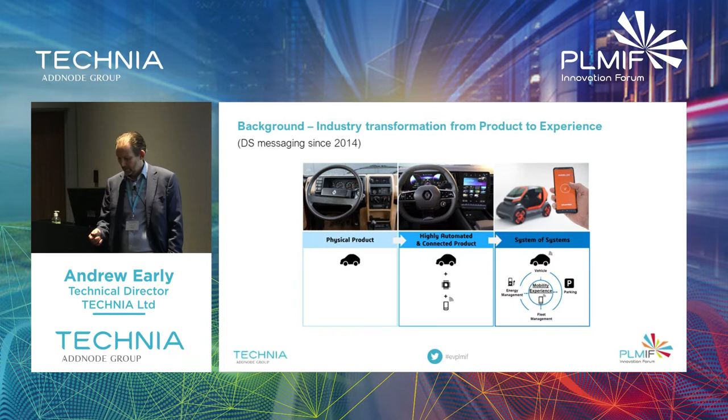So I've cheated a bit, and this should work. I made this little thing. This goes straight to the Dassault definition of what a virtual twin is as far as Dassault is concerned. So in short, there's the term digital twin, and then Dassault coined the term virtual twin. They also use the term virtual twin experiences. Personally, I think that's the most useful term.

In simple terms, Dassault's position is that a digital twin could just be effectively a dumb model of a physical object. I know in the US, they've effectively reverse engineered the B-52 bomber, which was designed on paper, but they've now made a 3D model of it. You could argue that's a sort of relatively dumb digital twin, not without utility, but Dassault's point of view is coming at the other end.

If you're engineering a product from the beginning, you want to have this environment where you're engineering, designing, specifying your products in a space that allows you to play through its in-use experience from the user's point of view, from the product's point of view as well, from its service life. So inevitably, that means simulation is actually right at the core of the virtual twin.

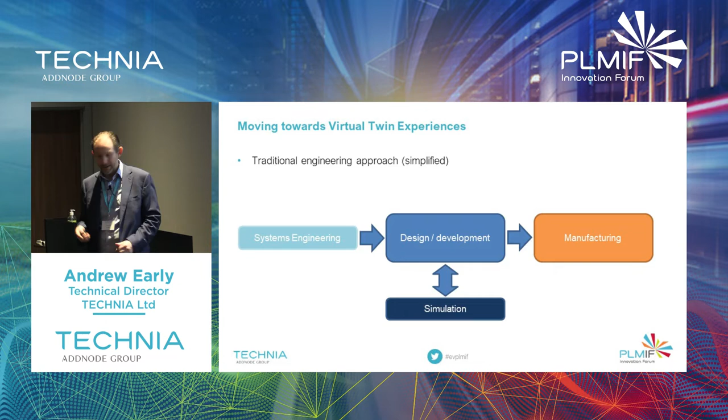If you think about it from a point of view of a more traditional look, and this is massively simplified, but just to give an idea, we had an environment where you had design and development with simulation feeding in, but you had systems engineers, often paper-based or even document-based, passing in information. These arrows represent essentially barriers, and I guess this represents to a certain extent silos, really. Then manufacturing follows design and development. It always would overlap in reality, but in simplistic terms, that's where we're sort of coming from. But that's left us in this world.

So this was last week, I was at a Dassault event, model-based systems engineering in Gothenburg. There was a very nice gentleman from Kongsberg Aerospace and Defence, and they're a long way down this road of basically digital processes for the systems engineering side of things, model-based systems engineering.

One of the problems they're trying to solve is exactly this. You've got so much information on these complex systems. The more complex we're getting with things, you've got requirements, you've got models for systems models, you've got dynamic models, you've got stress models, you've got CAD models, documents coming out of your ears, and you end up to the point you've got to have this new role, which is effectively a system archaeologist, which is not going to be any fun for anyone.

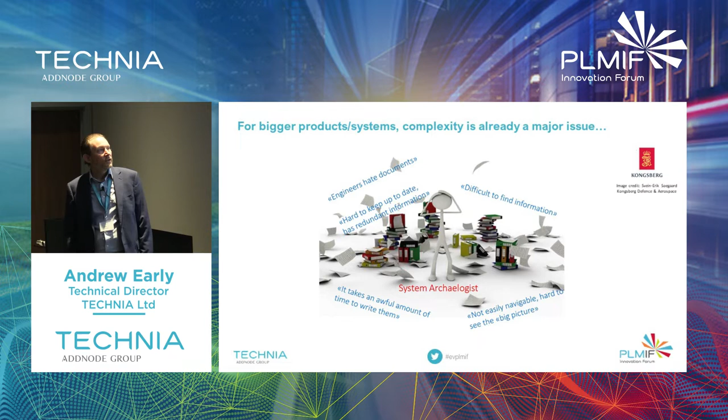One of the roles Dassault is trying to do with this virtual twin thing is the 3D Experience, which is effectively your digital repository of data and associated products. If you've got requirements, logical architecture, physical architecture and products designed in this environment, with people from different disciplines having access to what they need, things move faster and people make better decisions because all the information is available. That's why Dassault has invested so much in simulation, because it underpins everything going forward.

It's also a bit like Dassault acting as a parent, guiding us as a community towards doing the right thing. By getting our data into a system, in this case the 3D Experience platform, even though we might not be doing model-based systems engineering yet, or digital manufacturing, they're saying they'll curate and structure our data so that when we do start doing this, and customers and suppliers get us to work with them in this way, the system will support it. That's what I'd like to think anyway.

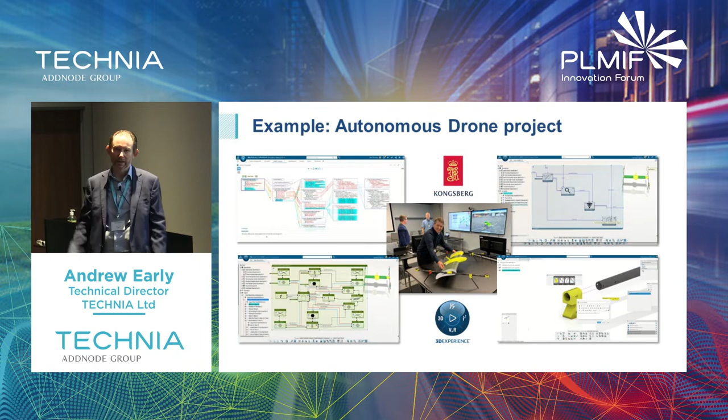Essentially, this is Kongsberg, the same company this gentleman was from, Aerospace and Defence. They've done quite a lot of this. Our colleagues in Sweden did an end-to-end expose to the senior management using a real product. So this is just a quick... does the video play by itself?

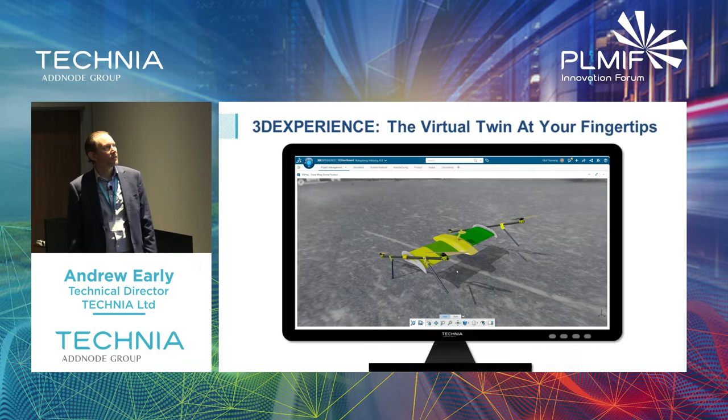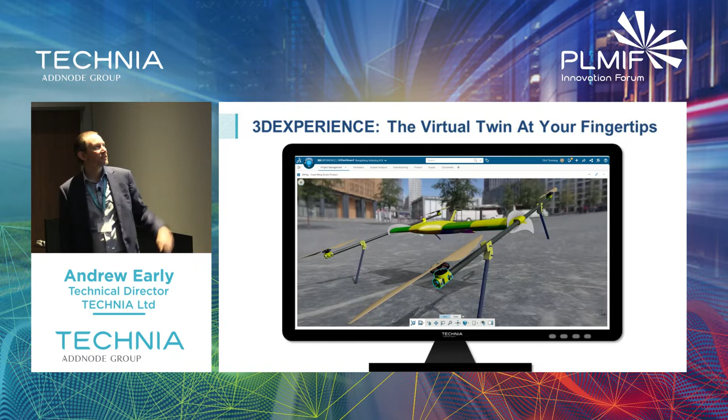Yes, so that's 3D Experience. This is a CAD model, from a student project, but the data is less important than the story it's telling. The nice thing about this is it's an autonomous drone, completely harmless - sorry, I had to put a bit of context there.

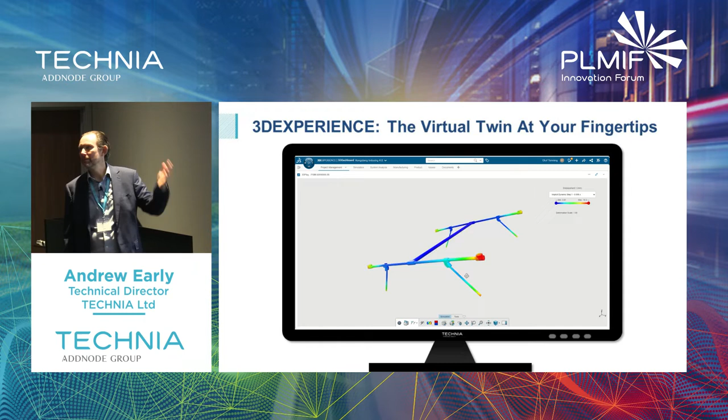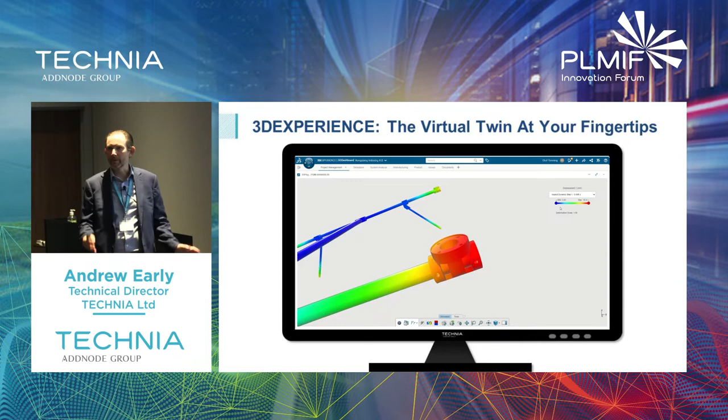You can see you've got the model for general information review, a simulation model of the same thing, and then a manufacturing work instruction model. The average person in 3D Experience can get hold of this data, view it and interrogate it, without going to the analyst, the manufacturing engineer, or the CAD engineer.

I'm going to skip a little on that since there's more later. So you start at requirements. On the platform, requirements are stored as database objects rather than documents, even though we've got a friendly view that looks like a document. That's good, because if requirements are stored as database objects, they can be shared between different people or stakeholders, be in different lifecycle states, be revisioned, and you can configure requirements.

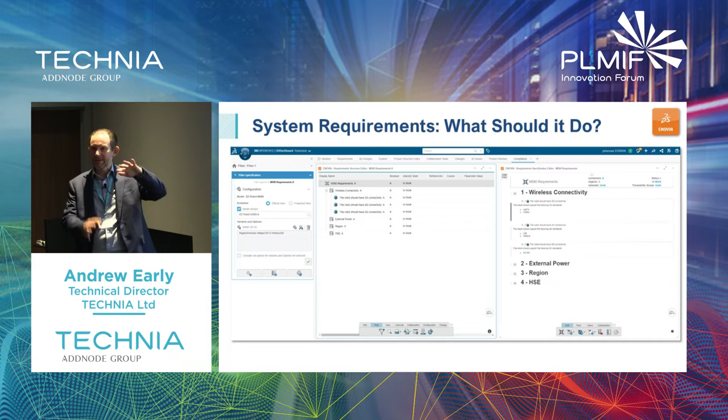If you have a product - a superset of requirements - that comes in three variants, you can filter those requirements down depending on which product it is. Collaboration at this level, until last week I was thinking, why do you need to do that? Then you speak to Airbus and BAE Systems, who are doing another type of autonomous drone that talks to flying radars and all manner of things, and you see that systems get very complicated, which brings us to functional models.

This is inside CATIA, but there are other tools that can be used to do this and then integrated with the platform. So what does it need to do? How should it work?

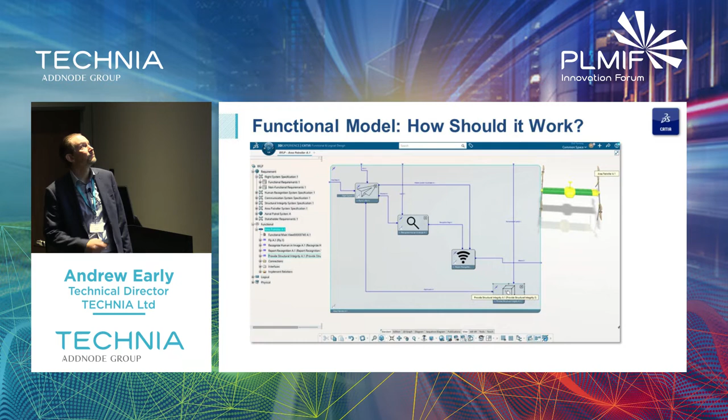Logical. How do you actually separate the product into modules that do certain things? So on the left, we've got the RFLP tree, which has been in native 3D Experience since it was there when I looked at it in 2009. So requirements, functional, logical, physical, which you'll see in a second. Behind these could be mathematical models that simulate the performance of that particular module, whatever it might be.

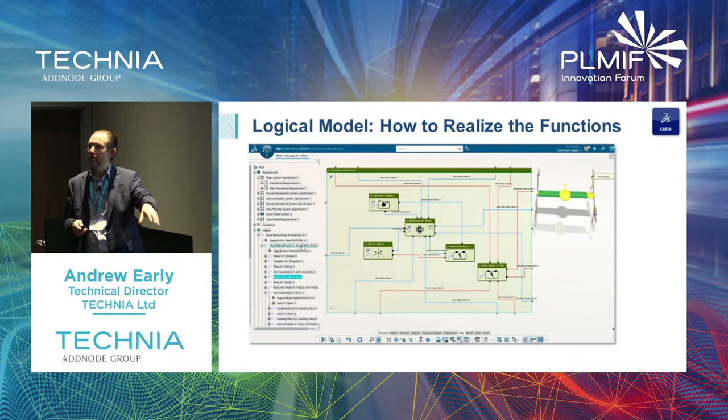The spoiler alert is that this can all be played in the platform using those mathematical models. You can have the CAD models moving around doing whatever it is you need to do. You can even have physical bits of hardware plugged into the platform, and instead of driving the model, you can actually drive the hardware with the software integrated into it. This is all absolutely present, and we saw all of this last week working, which I'll show a bit more.

And there's the CAD model. The nice thing now is that each object of the CAD model is linked back to the objects you've previously defined. So what requirements are they satisfying? What logical objects do they represent? Or functional objects do they represent?

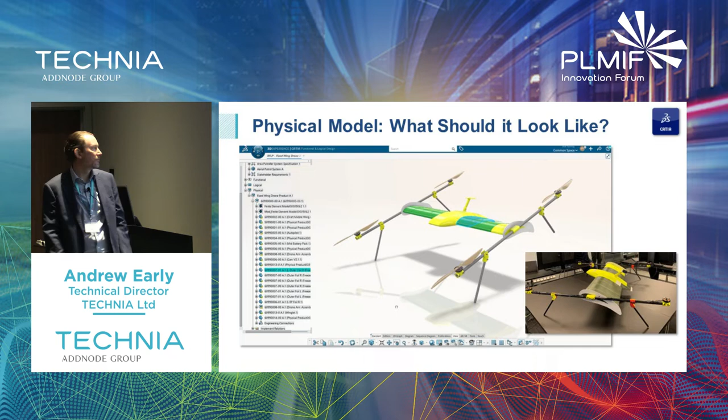Simulation model. Will it break? Red is bad, I'm told. And then you've got your manufacturing model, your work instructions.

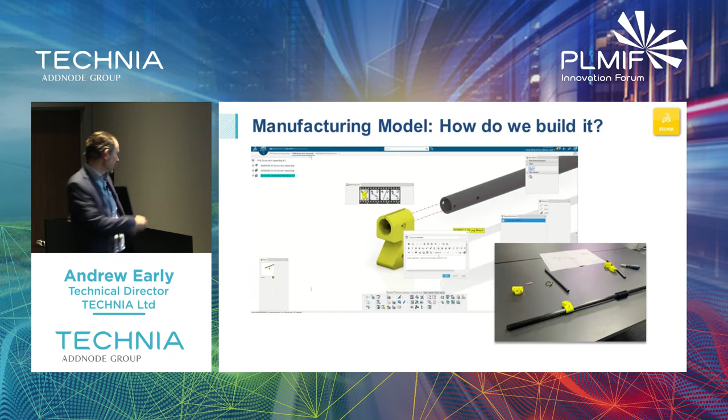So in the full version of this, we actually go through a process of saying, okay, design change comes in. So I'm just going to trail that a little bit. So here we've got requirements. This is a CATIA screen showing this whole MBSE style traceable tree, effectively.

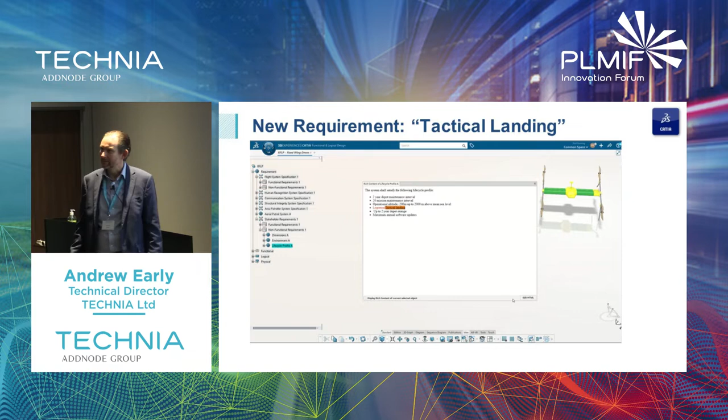And so in CATIA, you can go to the requirement, and not many people know this. In this case, we've got a requirement where a logistical landing, gentle - they want to be able to do a tactical landing, which is essentially a controlled crash, faster landing. So if you're going to do that, instinctively you say, oh, I've got to upgrade the landing gear.

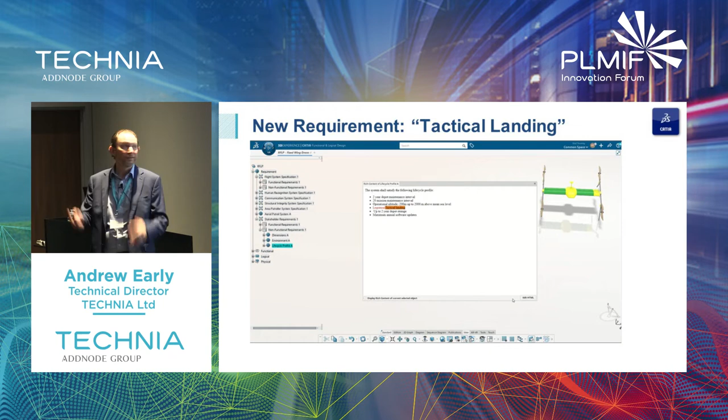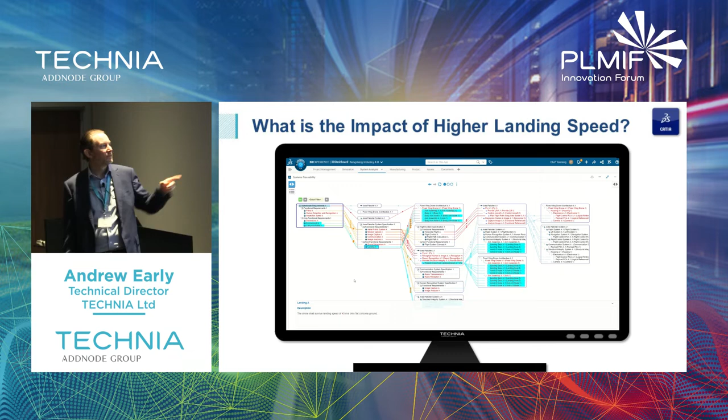But what does that impact? This is effectively a map of your 3D experience platform, your product in the 3D experience platform. This is the system's traceability. So because you've put your data into an organized structure, you can click on the requirement and it shows you all of the downstream things that trace back to that requirement. So if you're changing the landing speed, essentially, this should show you all the bits that need attention that are impacted by that.

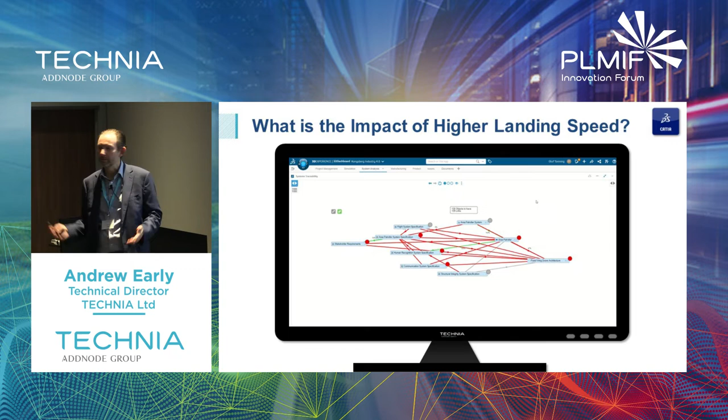So the whole idea of virtual twin experiences comes back to, frankly, getting your data into a manner that can be managed and used to be able to run these experiences, whatever they may be. It could be just essentially putting on a virtual reality headset and doing 3D - 3D experience, say no more. Or it could be quite complicated end-to-end simulation processes involving hardware in the loop, software in the loop, user in the loop, or whatever it is.

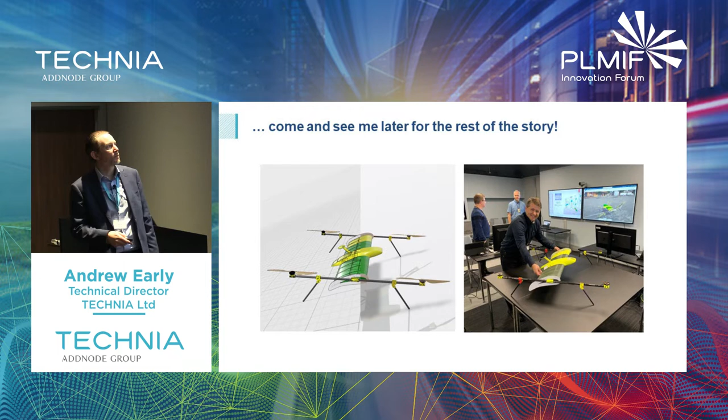As I said, if you want to find out a bit more about all this, please come upstairs and I can show some of this upstairs, or by all means talk to me or any of my colleagues who will fill you in as best we can. I'll say that specifically the model-based systems engineering side of things is, to me personally, quite a new thing, so I may well get other experts involved. So as I said, I'll be about today and tomorrow.

In terms of where our customers are at the moment, 3D Experience Cloud is seeing accelerated adoption. These days, it literally is about 10 to 1 between people taking on cloud versus on-premise. On-premise still remains the ultimate flexibility for people who've got very demanding business processes or demanding security requirements, like the MOD might insist that you have your data on site, whereas cloud is inevitably hosted somewhere. In our case, it's usually in Paris. But cloud is accelerating. It's starting to become clear what Dassault are doing with it.

In terms of integrations, which are absolutely vital for virtual twin processes ultimately, and they're introducing some new cloud-only applications. So things like change intelligence, issue intelligence, weight and balance, sustainability. These intelligence apps, some of them have twins on premise, but they use a different technology, whereas on cloud they're using this new what they call the semantic graph index, which is another acronym I'm going to have to remember, which is really next generation stuff.